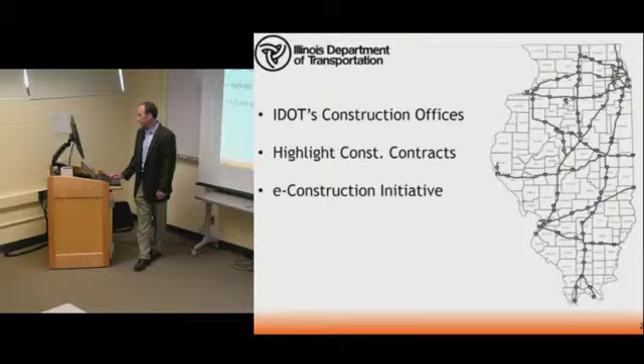So the mission of the Illinois Department of Transportation is to design, build, operate, and maintain a world-class transportation system that provides safe, efficient movement of people and goods to support the state's national and world competitiveness. It's also to make sure that our transportation system is safe. Our mission is also to increase the quality of life of our citizens and visitors by reducing congestion and increasing their mobility. And we do all of this while demonstrating a respect for the environment.

In simple terms, what makes a great transportation system great is its ability to connect users from their origins to their destinations. We don't just have a transportation system to have a lot of lane miles and a lot of bridges. We have a transportation system to make sure people can efficiently connect from point A to point B, regardless of where those points might be.

So the department is led by a secretary who is appointed by the governor. We call it the Secretary of Transportation. The department was reorganized by our current secretary to consist of 9 offices. These offices include the Office of Highways Project Implementation. That's the office that I'm in, as well as IDOT's Highway Construction. That's where we're housed. Another office is the Office of Intermodal Project Implementation. They deal with railroads, airports, other modes of transportation. The Office of Planning and Programming. They deal with helping develop the size of our program. How much money do we have to spend on what we can build?

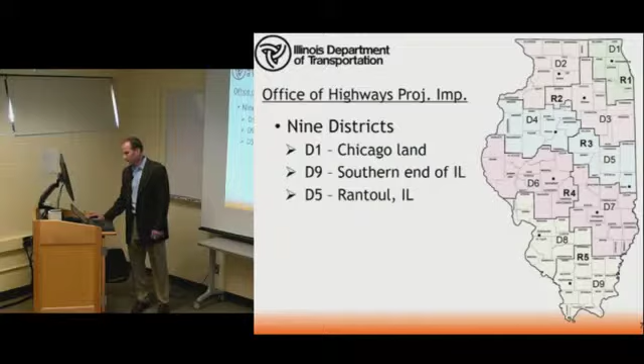So the Office of Highways Project Implementation is organized into 9 districts. These districts are distributed statewide, as well as 7 central bureaus. All of the central bureaus are located in Springfield, Illinois. District 1 is located up in the Chicagoland region. District 9 is the southern tip of the state. For the people that are here in this room today, you're in Rantoul, you're in District 5. So that's how our districts are organized.

The 7 central bureaus include the Bureau of Construction, again where I work, the Bureau of Bridges and Structures, the Bureau of Design and Environment, the Bureau of Land Acquisition, the Bureau of Materials, the Bureau of Operations, and then the Bureau of Safety, Programs, and Engineering. These 7 central bureaus work with our counterparts in each of the 9 districts, again, to design, build, operate, and maintain the highway infrastructure that the department has.

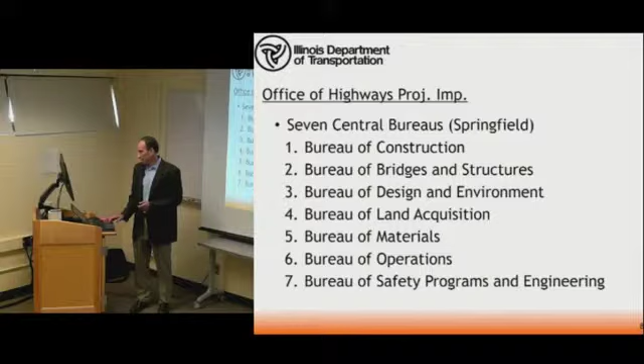Just some fun facts: the state highway system that I'm referring to consists of about 16,000 centerline miles or 46,000 lane miles. That's what we have on our state system out there, not including the locals. We have about 7,800 bridges, and those 7,800 bridges include about 84 million square feet of bridge deck. So we have a pretty large system that we have to design, build, operate, and maintain.

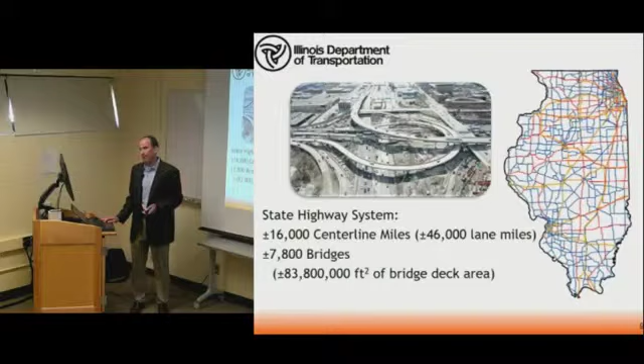We do all of this with about $2 billion a year. Now this varies from year to year. It's not necessarily a real stable number, but historically, if you were to look at it over time, it's been about $2 billion a year. That might sound like a lot of money, but people are typically surprised to learn that this revenue that we use to maintain our system has really been pretty flat, increasing just a little bit since the 1990s.

How many people in this room, other than myself, were alive in the 1990s, in the early 1990s? So just a few.

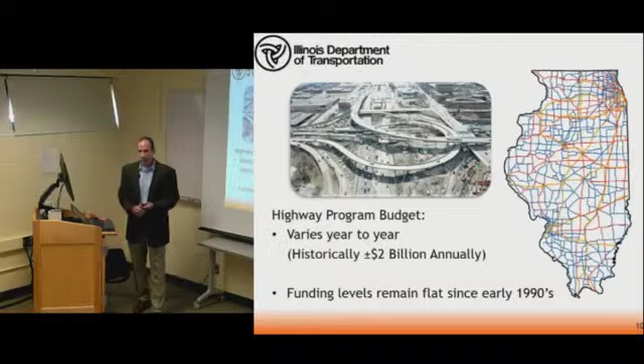So I trust that you all realize that since the early 1990s, we've added to the size of our infrastructure. Our cost to design, build, operate, and maintain this infrastructure has increased exponentially. So it's a struggle sometimes to fulfill that mission of providing that world-class transportation system. So we have to be smart about how we use our limited resources.

Ways that we can do this is by not necessarily always fixing the worst first. Sometimes you'll see us working on some projects that don't seem to be in as bad a shape as another piece of our infrastructure. But we do that because if we can implement preservation treatments at the right time, we can reduce our maintenance cost, therefore being more wise with the use of the limited funds that we have.

Obviously, though, we also have to try to find new funding sources. The 1990s funding levels won't work forever. We're going to figure something out, and so we're constantly trying to do that. We also have to continually look for ways to make our system more efficient. It's hoped that the developments in technology, specifically with autonomous vehicles and connected infrastructure, will help us get more capacity with our existing lane miles.

In the past, the most common method to increase your highway capacity was to add lanes or add to the size of your footprint. In the future, it's believed that these connected vehicles and connected infrastructure are going to help us get more throughput on the existing footprint that we have, since the cars are smart and they can kind of talk to each other. Therefore, we may not necessarily have to keep expanding the system like we have done in the past.

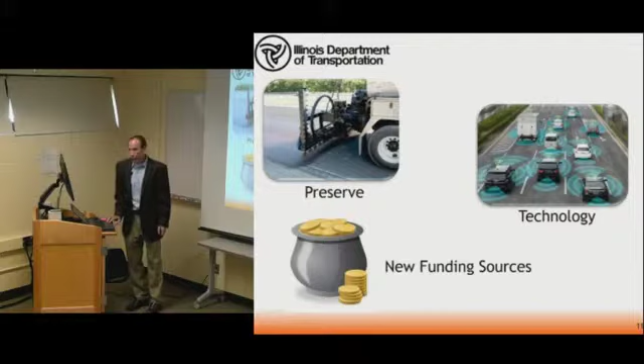But anyway, you all in this room are thinking, this is a long way from construction. So let me get back on topic of actual construction stuff. The best way to summarize construction is we build projects. The construction section of the department is responsible for projects once they're included on a letting. Once we include contracts on a letting and get them awarded to a contractor, we take over responsibility for them, and we maintain that responsibility until the contract work is complete and we've accepted the work.

At that point, we hand the torch to our operations section of the department that operates the facilities that we've built. Let me back up here just a minute. Remember before I talked about how we have 9 districts and 7 central bureaus? Our district construction staff is responsible for the day-to-day contract administration.

The department staffing for a contract will typically include construction inspectors. These inspectors monitor the contractor's work activity to ensure the work is in compliance with the contract. They conduct field tests on materials to ensure that the materials meet the contract requirements. They document their monitoring and testing activities so that we have records of everything that we've done. And they're also responsible for measuring and recording quantities of work that has been completed.

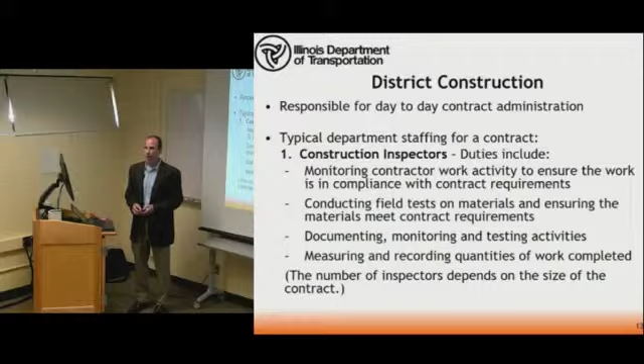The number of inspectors that you'll see on a construction contract will depend on the size of the contract. Small contracts might just have the RE, I'm going to get to the resident engineer in just a minute, but might just have 1 or 2 people on them. Large contracts might have in the 10s or 20s or 30s of inspectors. So after the inspectors, I'm going through these in the order of hierarchy. The next level is our resident engineers or our resident technicians.

Each contract will have a resident, but a resident may have more than one contract. So a resident might be responsible for multiple contracts at any given time. There is no single more important position in the Office of Highways Project Implementation than a resident engineer, or a resident technician. Residents represent our office in dealings with the contractor, in dealings with cooperating government agencies, for example, local cities and villages, the Federal Highway Administration. They also represent our office with the traveling public and the taxpayer on a daily basis. On a construction contract, the resident engineer is the face of the department.

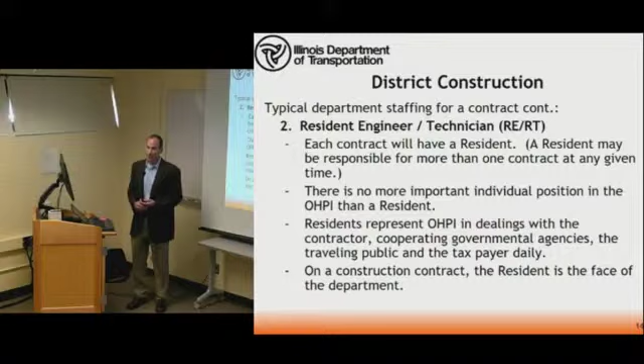The duties of a resident typically include supervising their assigned inspectors, monitoring the work, and assisting these inspectors as needed. The residents also have to insist on a high standard of work in accordance with the contract requirements, while recognizing that the project is custom built. So they have to make sure the contractors are building what they're supposed to be building us, but they also have to realize that changes are going to happen, and they have to work through those changes to ensure we administer stuff in the most economically and timely manner possible.

Residents have to monitor the contractor's progress and professionally communicate their concerns to the contractors. These can be a lot of tough conversations. Oftentimes things don't go well in construction, or you hit road bumps. When everything's going smooth, everything's rosy. When something starts to go south, tensions can get high. There's a lot of money involved with heavy highway construction. So the resident has a difficult challenge to keep their professionalism and communicate any concerns that they have to the contractors to keep our contracts on task.

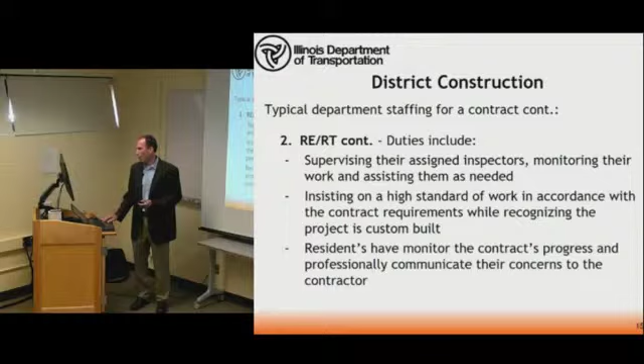Residents have to anticipate problems and then solve them before they result in costly and timely delays. Residents have to pay prompt, sympathetic attention to the problems brought forth by the public. At the end of the day, the public is our customer. We're building stuff for their use. We're connecting those origins and destinations. Customer's always right, so we have to treat them with their due respect.

And residents are also responsible for preparing and submitting progress payments for completed work. I could go on and on about the requirements or the duties that a resident engineer or a resident technician have to perform, but you all get the task. This is a very busy position and a very important position.

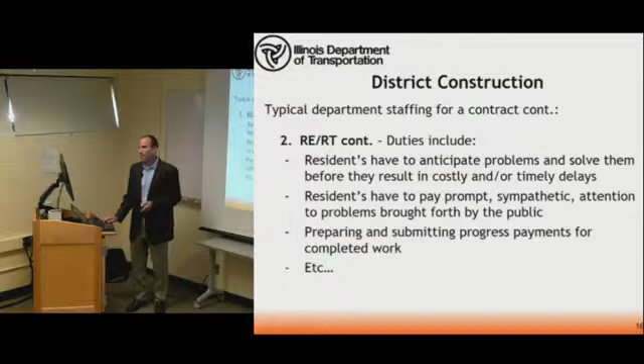Then as you climb the ladder, above the residents, we have what we call typically supervising field engineers. Supervising field engineers supervise their assigned residents, they monitor the residents' work, and then they provide assistance to the residents as needed. This assistance often involves resolving conflicts, approving changes that have arisen, and interpreting the specifications.

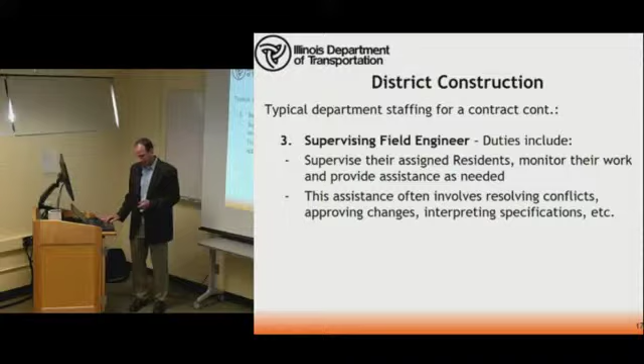After the supervising field engineer, or right above the supervising field engineer, we'll have what we call a district construction engineer. The district construction engineer heads the district's construction section, and they are charged with administering all construction activities of the district in accordance with the specifications and department policies.

And then lastly, as far as in the realm of construction, above the district construction engineer, we have a project implementation engineer in all of the districts. The project implementation engineer supervises the construction engineer and the materials engineer, and they are ultimately responsible for all construction and materials sections of the district.

Next, after we move out of the district and we come back to the Central Bureau of Construction, which is located in Springfield, again where I work, the Central Bureau of Construction responsibilities include pre-qualifying contractors to bid on our contracts. So the way our contracts work is we have what's called a letting. We advertise contracts on a letting or solicit bids via this letting terminology. And we don't just let anybody bid on the projects.

We pre-qualify them to make sure we have a level of comfort that when we enter into a contract with these people, if they were the successful low bidder, that they have the capacity to actually do the work. Nobody wants to start a job, get in the middle of it, and then find out our contractors, for whatever reason, aren't able to complete it. So we pre-qualify the contractors to bid.

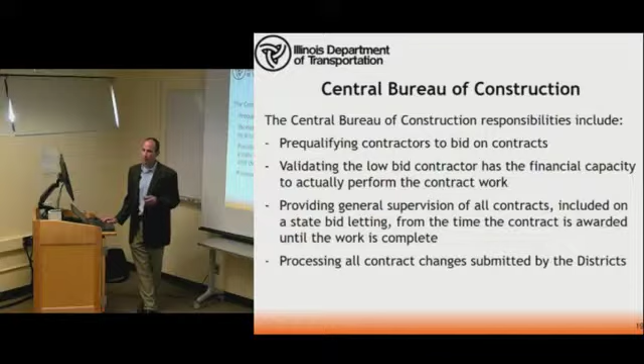The Central Bureau of Construction is also involved with processing all contract changes that are submitted by the districts. So something arises in the field that necessitates a change, the Central Bureau of Construction processes those changes, looks at some of those changes depending on the nature of it, and then helps process them through.

The Central Bureau of Construction also processes all progress payments that are submitted by the district. So all payments for all of the construction work that you see across the state in our system flow through our office to the comptroller to ultimately get the contractors paid for the work they performed. Central Bureau of Construction assists with the resolution of construction problems and disputes as needed.

We are responsible for developing uniform construction policies, practices, and specifications, and we do this in cooperation with the districts, with the other central bureaus, and with our industry partners. And then the Central Bureau of Construction also provides training to help ensure that the specifications and policies are administered consistently statewide. A contractor that's working in District 3 or 4 should expect us to interpret policies and administer specifications the same as we would in District 5.

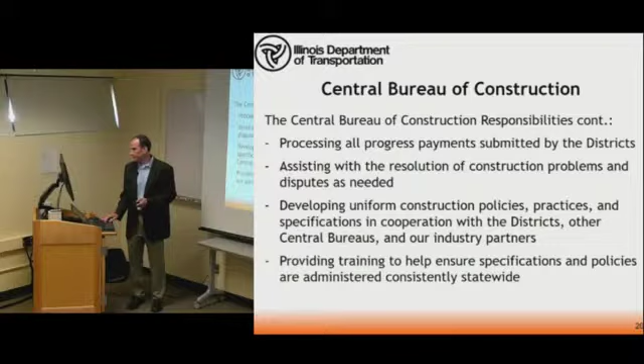So that kind of brings me to the end of an overview of the department. I know that's all real exciting stuff. So now I'm going to roll into an example project and actually show you all what it is that we actually build, or typical stuff that we build.

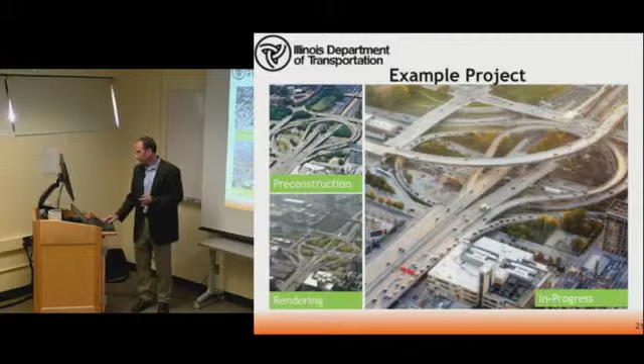So this project is oftentimes referred to as the Circle Interchange, and it's up in District 1, the Chicagoland region. The formal name of this interchange is the Jane Byrne Interchange. The Jane Byrne Interchange is located in the heart of Chicago, and it connects I-90/94 to the north with the Congress Parkway to the east, the Dan Ryan I-90/94 to the south, and then the Eisenhower Expressway or I-290 to the west.

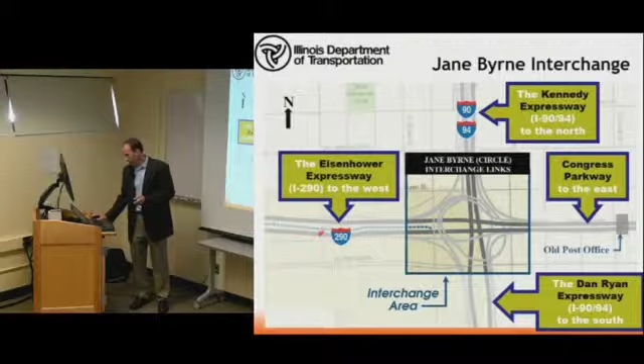The Jane Byrne Interchange, oops, sorry, let me back up there. The Jane Byrne Interchange was built in the 1950s and the 1960s as part of the interstate highway system, and this interchange is critical to the nation's transportation system, particularly for freight movement on the interstate system and arterial roadways, as well as to regional railroads and waterways.

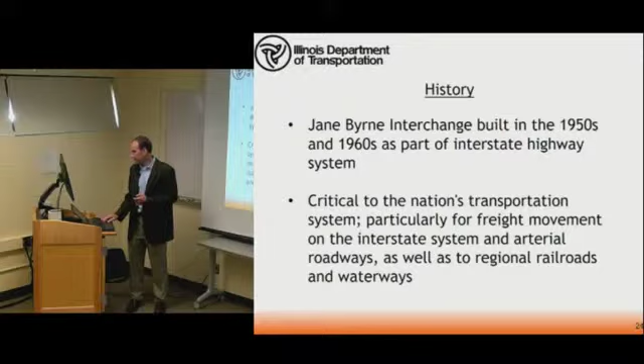The problem with this interchange is that it was built more than 50 years ago and hasn't had a major rehabilitation since this initial construction. Again, you all can imagine the volume of traffic and the things that have changed from the time this interchange was built in the 50s and 60s to what it experiences today. So we have high traffic volumes out here, single lane ramps with tight curves that make the interchange prone to congestion, which causes it to operate under breakdown conditions for most of the day, meaning gridlock most of the day.

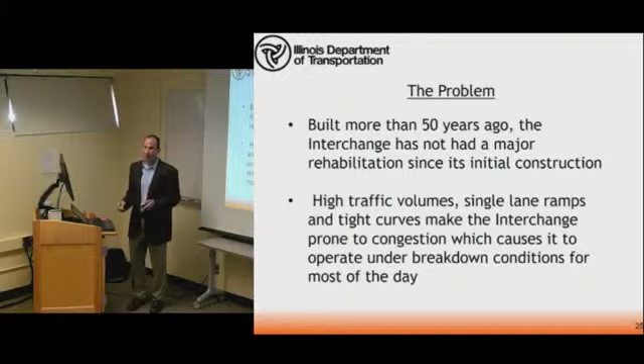The American Transportation Research Institute and the Federal Highway Administration have indicated that this is the slowest, most congested highway freight bottleneck in the nation. We have about 400,000 vehicles a day go through this interchange, and on average we have about 1,000 reported crashes a year. So it has some issues.

The purpose of the improvements that we're making at this particular site include improving the safety and mobility, improving the bridges, roadway, and drainage systems, doing this while minimizing environmental impacts, and it's also to enhance community connectivity on the local street network.

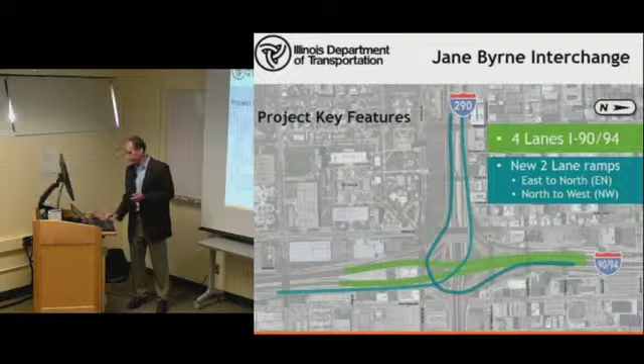Key project features also include reconstructing several of the crossroad bridges, or the structures that are carrying various streets across the interstate system. So these include Morgan Street and Peoria Street that are crossing I-290, Taylor Street, Harrison Street, Van Buren Street, Jackson Street, Adams Street, Monroe Street, all of those that are crossing I-90-94, as well as redoing a whole bunch of other bridges and ramps in the heart of the interchange, and building some big flyovers that I just showed you a minute ago.

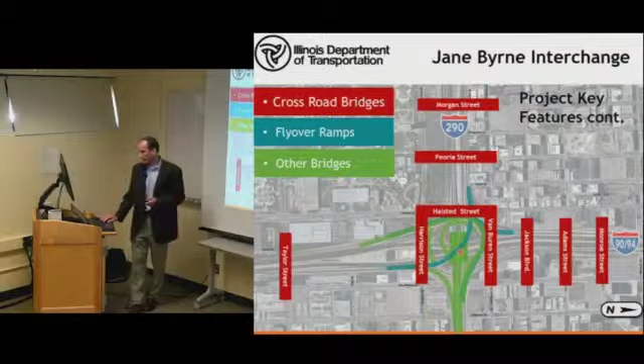The total estimated cost for this particular project is around $680 million, so it's a big project. This number includes all of the engineering, both the preliminary engineering and the construction engineering. It includes all of the land acquisition cost, all of the actual construction cost. We build in contingencies because we know there are going to be changes, etc. So that's kind of our total estimate for the project.

And this particular project is broken into 35 separate construction contracts. So remember when I said before, the way we do this is we have a letting, we advertise contracts on the letting, and then contractors bid on those contracts, and then we select the low bid contractors. This particular project has 35 separate individual contracts that will be let for people to bid on.

We started letting projects in August of 2013, and we will continue to do so, I believe, through September of 2020 is what our current targets are to get all of these 35 projects let. The overall completion of this project, if everything stays on task, we expect to be done out here around November 30th or December 1st in 2022. So we've got a lot of work left to do. We've got a lot done, but we have a lot left coming.

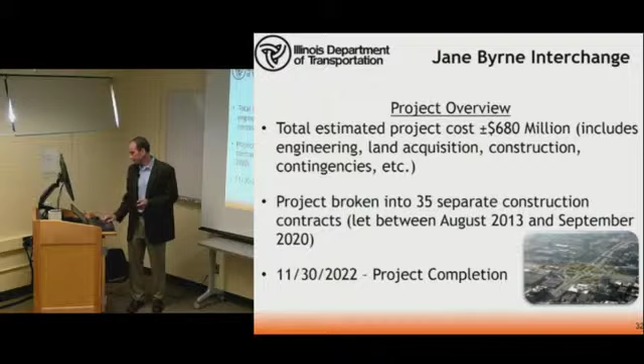The status of where we are today is that 16 of the contracts are substantially complete, or we've got most of the work done. That's about $250 million of the 680 we've got done. We have 8 contracts currently under construction, total value of work of around $160 million. And we have 11 contracts that are remaining to be let, or about $270 million. As I said, we're going to be letting projects all the way up through 2020, so we don't have all of the design done yet. The design for this project is about 70% done, and the construction is about 60 to 70% complete.

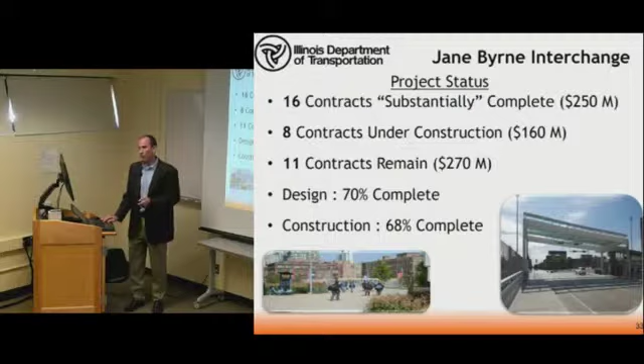So to help you understand the substantially completed construction, or what we've done so far, this slide demonstrates that we've built Taylor Street over I-90-94. We have the north to west flyover bridge complete. We have completed Harrison Street over I-90-94. We've completed Halsted Street, Peoria Street, and Morgan Street.

Halsted Street, I'll show a photo of it being completed a little bit later. We don't normally build vertical type construction; we typically stick with horizontal construction. Retaining walls, roads, and bridges are what we typically build. Every now and then we do get called to do things outside the norm. So like Halsted Street, it has a canopy on top of that bridge for the CTA. And Peoria Street, it's a large structure, but it's actually just a pedestrian structure. And as part of that contract, it included building a new CTA station for people to board the CTA.

The ongoing construction includes the westbound I-290 main line. It includes a Jackson Boulevard utility relocation, ramp NE. So remember I said NE, they did a good job from the design standpoint of naming all of these ramps. So ramp NE stands for the ramp that's going from the north to the east. That's how they numbered them.

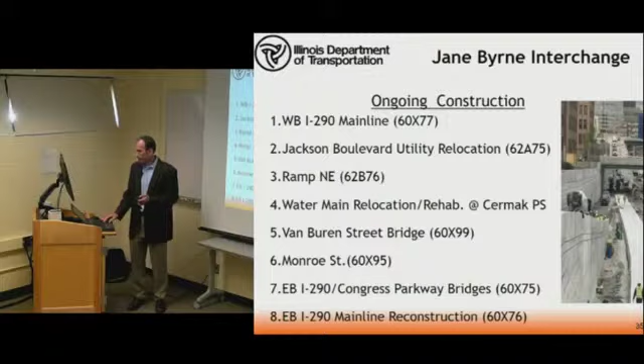Here we see where some of this major ongoing construction work is located. Again, this is what we're working on right now. So we have the eastbound and westbound I-290 main line. We have some water main relocation and retaining wall work down in this area. We have this ramp north to the east that we're working on.

We have the eastbound I-290 bridges in here, as well as, actually down here, that includes the rehabilitations that we're doing to some of the Congress Parkway bridges. Congress Parkway turns into I-290 for those who have been in downtown Chicago or are familiar with this. We're also working on Van Buren Street over I-90-94. We have some utility work going on at Jackson Boulevard, and then we're working on the Monroe Street structure over I-90-94.

Some of the major upcoming work includes ramp EN, or ramp from east to north, as well as what we call the interchange ramp completion contract. There's a lot of work in this particular contract. Both of these first two bullet points that I show you up here, you'll note that we've got them advertised right now, and they're on our November 9th letting. That's our next letting, November 9th of this year. So these two projects are actually on that letting, and will quickly be changing from upcoming construction work to ongoing construction work.

We also have the Congress Parkway / Ida B. Wells Drive Viaduct painting coming up. We have the northbound I-90-94, southbound I-90-94, some interchange high mast lighting and ITS work we have to do, and then we'll construct the Adams Street over I-90-94 and Jackson Boulevard over I-90-94, and also we'll wrap things up with some green space, landscaping, and some minor aesthetic type things.

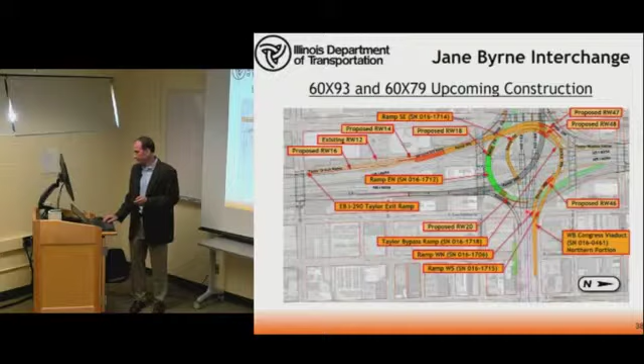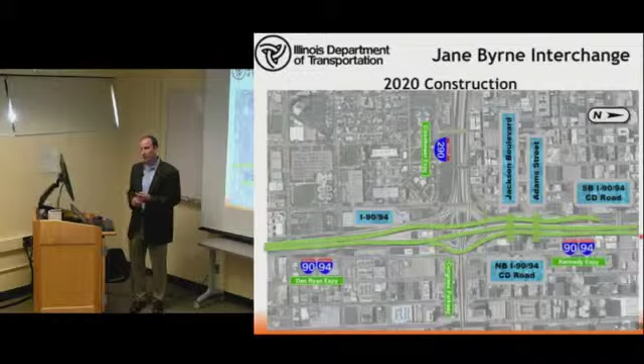Following construction of the east-west portion, when we get the I-290 and Congress Parkway work done, we're then going to switch over to the north-south reconstruction of I-90-94. This will also include the Jackson Boulevard bridges and the Jackson and Adams Street crossover bridges, and we're targeting to start some of this work around 2020. And again, the overall completion of the project is scheduled for December of 2022.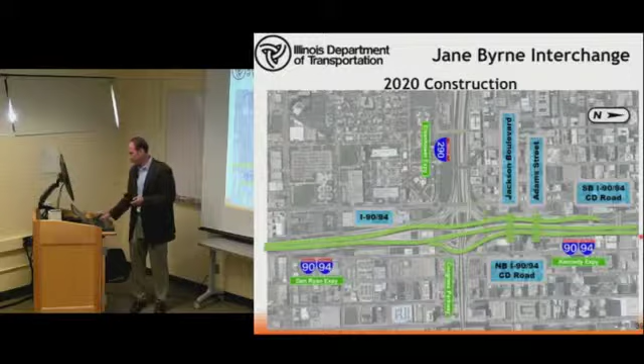Some of the expected benefits once this project is complete include improved safety, reducing congestion and delays, and also reducing environmental impacts. So remember when I started this, I talked about how this interchange is at gridlock most of the day. It has about 1,000 crashes a year that are reported. Those are the things that we're hoping to fix with this improvement when all is said and done. It won't be perfect because we still have a lot of traffic up there, but it will be better than it was.

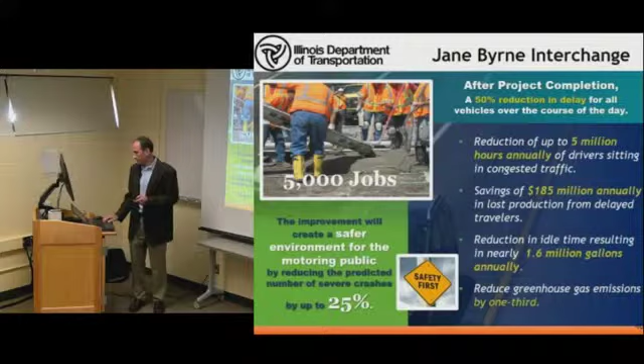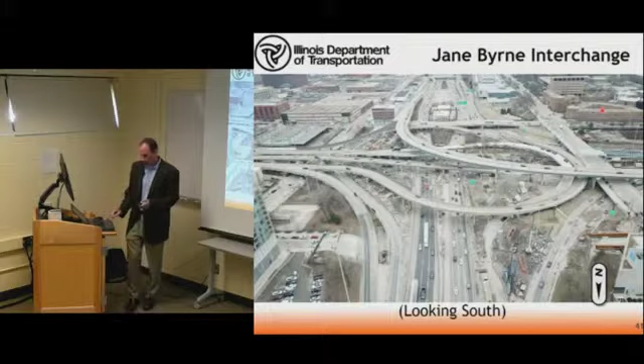We have a lot of different construction types out here. Typically, whenever we're building a bridge, we have our beams. Those beams might be concrete, they might be precast, pre-stressed concrete, or they might be steel. They might be rolled steel beams, they might be plate girders. And then on top of those beams, our normal construction is a cast-in-place reinforced concrete deck that the cars drive on.

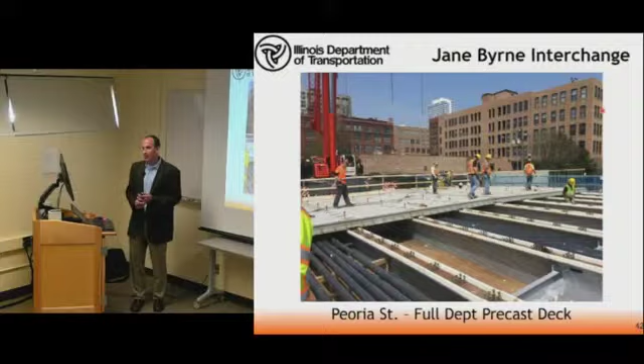On this particular structure, you can see if you look close at this photo that we're using full depth precast deck panels. So the way this works essentially is the precast concrete deck comes out, we lift it into place and set it on the steel girders, in this case, which is what this particular bridge is using. And after we got everything set in place, they used what's called ultra high performance concrete to lock the panels together, and then to also lock the panels to the actual steel beams.

When we got all of that done, we put a concrete overlay on top of the structure. I believe it was a latex concrete overlay that we put on it. But this Peoria Street is a big pedestrian bridge, essentially, that provides access from the south side of I-290 to the north side of I-290.

These temporary soil retention systems are commonly designed by the contractor who is responsible for the contract, and then we check and approve those to make sure the department's interests are being protected, that their construction techniques aren't damaging either our permanent construction or some existing construction adjacent to them, as well as making sure it's safe, because we're building in the middle of traffic, so we have to make sure that we're not doing anything to jeopardize the life, health, and safety of the traveling public with our construction activities.

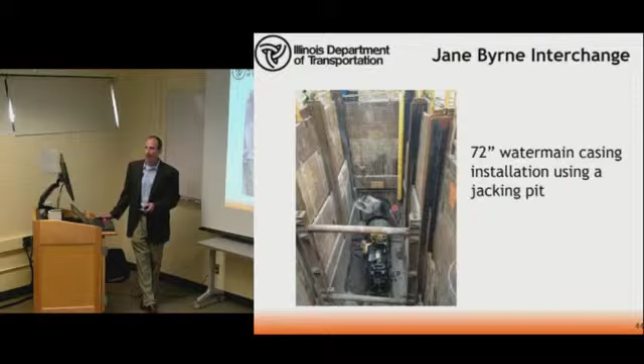What you actually see here, if you look closely, you'll see a gentleman down at the bottom, to give you kind of a feel for just how big all of this stuff is. And you see their jacking machine, or their boring machine, and then you see the casing being jacked. This is actually installing a 72-inch diameter casing, or a 6-foot diameter casing, to run a water line through that's underneath our roadway. So a lot of big stuff.

Most of the bridges that we're building out here are utilizing drilled shaft foundations. In Illinois, we have 2 types of deep foundations that we commonly build. They're either driven steel piling, or drilled shafts. Not to confuse the issue, we did have some micropile foundations, which are considered a deep foundation, on some of the structures up here. But our bread and butter is either going to be drilled shafts or driven piling. We typically use a lot more driven piling, like H piles or metal shell piles, than drilled shafts. But all of them have their purpose.

The typical shallow foundation that we would build would be like a spread footing. We don't build a lot of those. When we're building spread footings, it's either because we've got really good soils up top with no scour potential, like from a stream or anything to wash away those soils underneath our support, or we have rock really close to the surface.

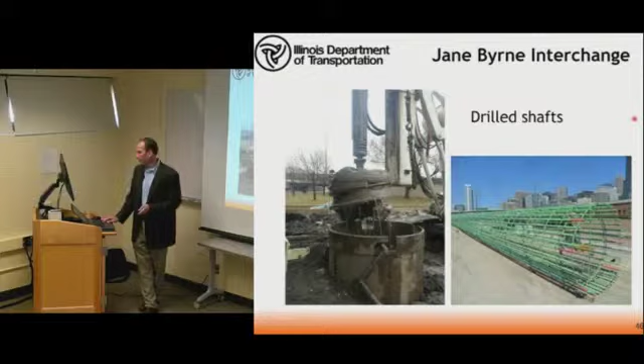Again, with these poor soils, at some point you have to transition from these ramps to pavement that's on grade, which normally involves an approach that's going up. Your ramp has to get a lot of clearance above the roadway that it's crossing, so you've got to start going up. What we're commonly doing out here for these ramp structures is we're building what's called mechanically stabilized earth retaining walls, or MSE walls, to transition from at grade up to get up on top of the bridge abutments and then continue across the ramp over top of the roadways that you're crossing.

Again, the soils are poor, so a lot of what they've had to do in a lot of locations out here is install what's called stone columns to improve the in situ soils that are up close to the surface so that they can handle the weight of this MSE wall that we're building. They're a big mass of fill material. It has a lot of weight. We don't want to have a lot of settlement.

Whenever we build these, unfortunately, we don't have the luxury of piling a bunch of dirt on it and letting the soils consolidate and settle for a year or two years or whatever, and then come back with our construction. So in this particular case, we're building stone columns to improve that ground, reduce the consolidation that's going to happen, and protect the pavement that we're building on top of it so it doesn't crack from a lot of settlement.

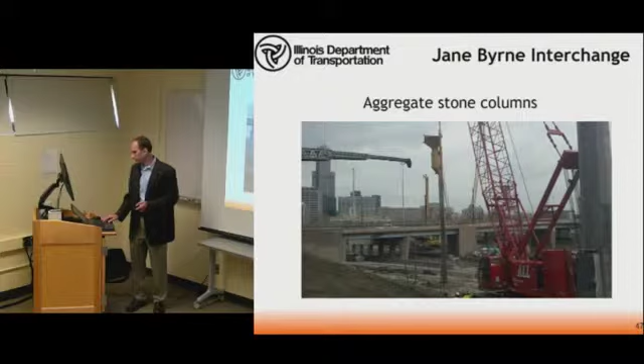In addition to using the stone columns, we are backfilling some of these MSE walls with lightweight cellular concrete. The normal way that you would construct an MSE wall would be, as you're putting up your precast panels to make this bin, you'd fill it up with fine aggregate, either sand or crushed or mechanical fine aggregate. That material typically weighs somewhere in the ballpark of 110 pounds per cubic foot. This lightweight cellular fill that we're using out here weighs somewhere in the ballpark of 30 or 40 pounds per cubic foot. So it's a lot lighter.

We're reducing the amount of load that we're putting on the soil up top. Therefore, these ground improvements that we're doing with our stone columns can be more economical by reducing the amount of weight that we're putting on them.

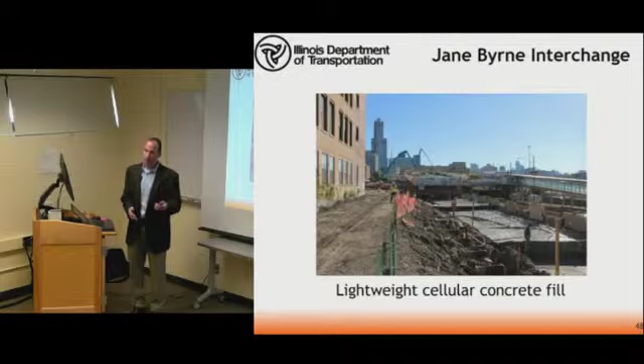For those who haven't seen MSE walls, this would be an example of a completed MSE wall out here. So again, down here is where you would have your approach roadway, that pavement on grade that's coming up to get on the bridge. If you could see underneath here in this dark area, you would start to see our beams for the superstructure that's taken off. This would be the abutment, if you will, that's on, say, drilled shaft foundations.

And inside of this, all of it is that reinforced soil mass. That's why we call them mechanically stabilized earth retaining walls. So the reinforced mass in this case is a lot of lightweight cellular fill that's supported on ground that's improved with stone columns.

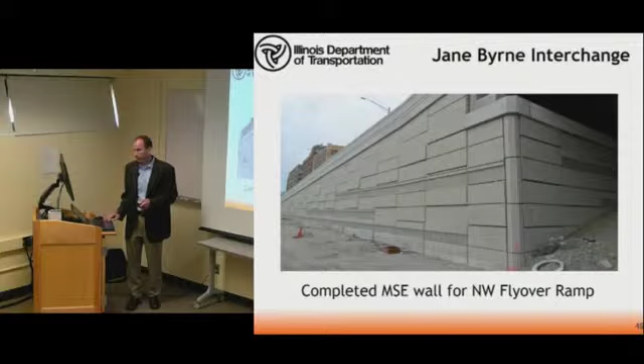We also have a lot of retaining walls that we're building out here. This is an example here in this particular photo. You can see a retaining wall that's being built, and notice the proximity of this wall to the actual buildings. It's very, very tight construction, and again, that's where we have to be careful that we don't damage other people's property as part of our construction activities. We have to use our due care.

Here we see those retaining walls where we're putting in ground anchors, also commonly referred to as tiebacks. We put tiebacks on these types of walls because a soldier pile wall commonly allows for a lot of horizontal deflection. We don't want a lot of horizontal deflection in these particular cases with these building structures up top, and we have to account for all of the surcharge load coming from these buildings. So we're installing these tiebacks.

If you can visualize a slender wall that wants to deflect from the load you're putting behind it, normally when you put tiebacks on a wall, you want to run them horizontal or near horizontal to handle the horizontal forces. In cases like this, we have very limited right-of-way, and because we have these buildings close to us, we can't send our tiebacks or ground anchors off of our right-of-way.

So in this case, if you look closely, you'll see they're installing these ground anchors at about 9 to 15 degrees from vertical, which isn't the most economical solution. In a perfect world you wouldn't do this, but when you're constrained by your right-of-way limits and you can't buy more right-of-way, you've got to do what you've got to do.

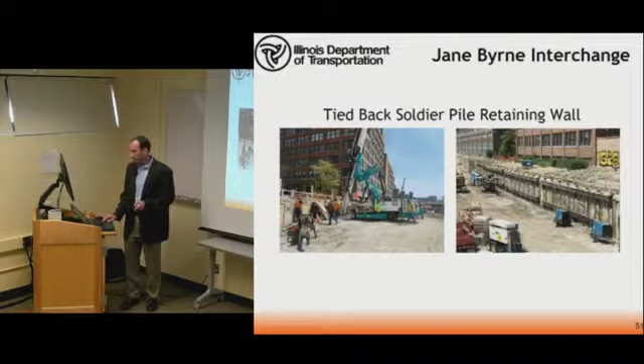Here we see some photos showing curved girder erections. This is a girder being lifted into place. If you look closely, you can see the curvature. This work is being done over high volume expressway lanes, so we have to close some lanes. We have to move through this erection very expeditiously to minimize the impact to the traveling public, and we have to do it safely.

For this sequence, the contractor's using shoring towers to help support these girders once they get them lifted into place. Our specs require contractors to have an Illinois structural engineer design or develop an erection plan for these types of beams. Then they submit that to the department, which reviews and approves it to make sure everything's going to happen safely.

Curved girders can be extremely problematic, more so than straight girders, because depending on the amount of curvature, the center of mass of the girder shifts. If you drew a chord from one end to the other, the center of mass gets outside of that chord. So if you just set that girder on two supports, by the laws of gravity it wants to fall over on its own. You don't really get stability until you get a couple girders bolted together.

All of that has to get detailed and worked out in the erection plan, and then we have to make sure the contractors are following that erection plan, using the right cranes, bolting the right numbers of girders together, so that we're doing our work safely. We're not jeopardizing the life, health, and safety of the traveling public, and we're also protecting the quality of work, so we know what we're building is in accordance with the contract specifications.

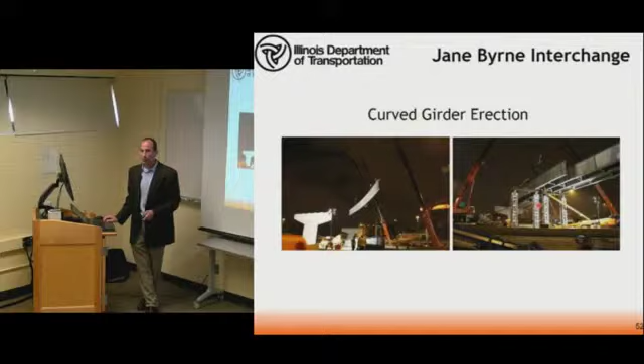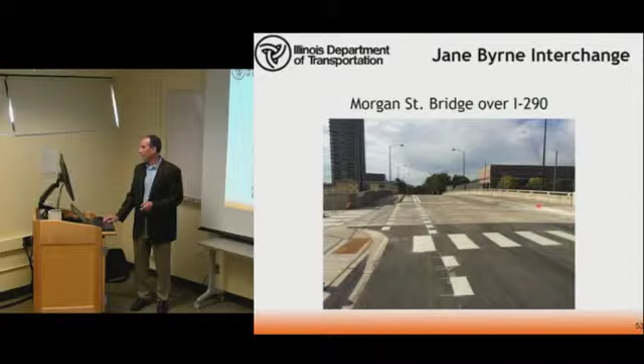Here are some photos of some completed bridges. Remember, I talked about the stuff that we have substantially complete or done. This is a photo showing the completed Morgan Street structure over I-290.

Here are some photos of that Peoria Street pedestrian structure with the CTA station that I talked about, our Chicago Transit Authority station. The lower photo is standing on Peoria Street looking at the entrance to the CTA station. The actual structure, the bridge, as well as the CTA station were all new.

This photo is taken from I-290 looking back up at Peoria Street. This is the entrance you're seeing here, down on this end coming into the station. This is just showing the station as a whole and what got built out here.

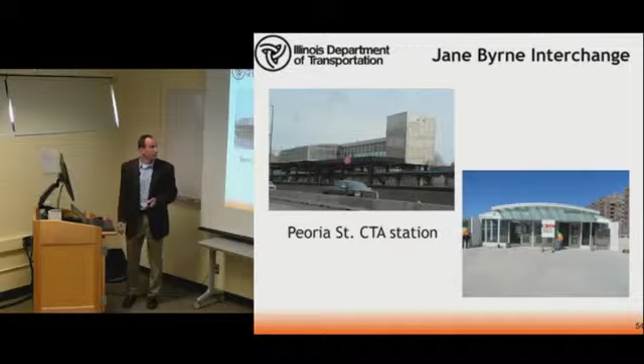Here is a photo of the Taylor Street Bridge over I-90/94 that was recently completed. And here is the Halsted Street Bridge and the CTA station canopy over top of I-290. This is the canopy that I talked about. If you remember one of those earlier photos I showed you, that's where you're at here.

All right, so hopefully that gives you a good feel for what we actually build in construction. When I say construction, what we actually do, we get these projects built that design has delivered to us.

The last thing that I'd like to touch on here this afternoon is the department's ongoing e-construction initiative, so that you can see some of the system improvements or some of the process improvements that we're making with regards to the use of technology.

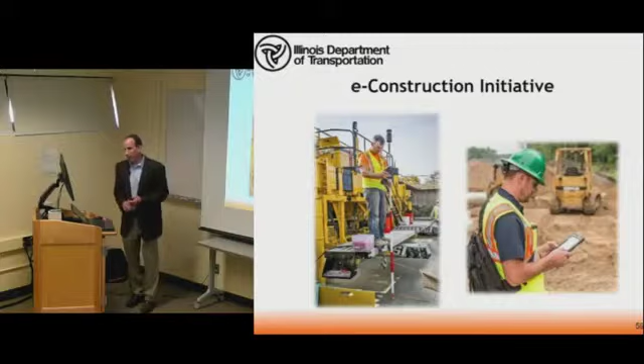So the department desires to utilize technology that will drastically reduce the use of inefficient paper processes, expedite communications and decision making while we're administering these contracts, enable the efficient retrieval and usage of contract administration data in ways that is not currently feasible, and then provide cost savings to the department.

We don't want to use new technologies just because it's cool and it's fun to use. We want to do it because it's a more efficient thing to do and ultimately results in savings to the department. Helps us get what we do done quicker and more economically.

And when I talk about here, this enable efficient retrieval of information and usage of contract administration data in ways not currently feasible, what I'm really referring to is, one, we can share this data during the contract administration process, but then now if we can capture this data in the right way, we can share it with other stakeholders. Remember when I talked about the Office of Planning and Programming, and then like bureaus of operations?

We can give this data or make this data available efficiently for other people to use whenever we're operating the system, maintaining the system, and then figuring out how to rehabilitate it in the future. Believe it or not, we struggle with that right now.

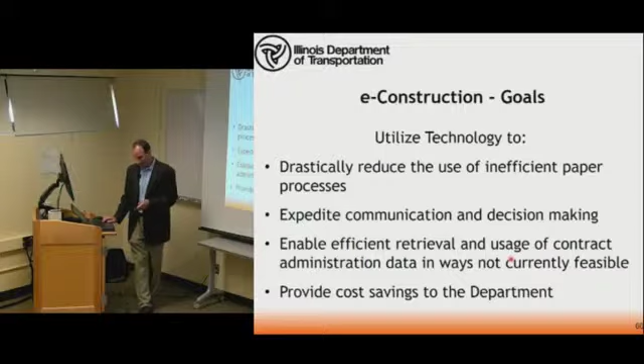So the major components of our e-construction initiative are, one, to implement a web-based contract management process, and two, to increase the use of electronic design data to facilitate construction and field verification of what we've actually built.

The web-based contract management process, or what we're developing there, will facilitate this paperless contract administration or near paperless contract administration that we desire to move towards. It will enable the electronic submission of construction documentation by all stakeholders, and then it will enable electronic approvals and then expedite our decision making.

So when I talk about stakeholders, the stakeholders on our construction projects will include the department, obviously will include our contractors who are building it for us. It'll include the Federal Highway Administration whenever federal funds are involved in the construction that we're building. And if it's a local agency project that was on our letting that we're administering or that we have some oversight over, it'll include the local agencies. So there's a lot of different stakeholders involved here.

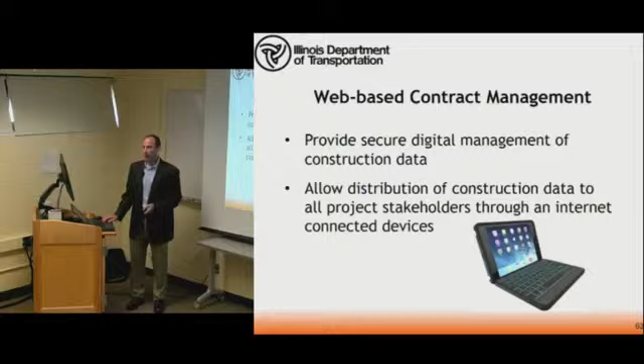The web-based contract management system that we're developing will provide secure digital management of the construction data, and then it will allow distribution of this construction data to all project stakeholders through internet-connected devices, like iPads, laptops, phones. It's supposed to work on all platforms.

So you probably think this doesn't seem new or earth-shattering, but let me paint the picture of where we're at right now. So our existing contract management consists of a contract record system that we call ICORS within the department, a materials record system that we call MISTIC, and then a contract payment management system that we call BCM.

The construction record system, or ICORS, is built on a Microsoft Access platform, and it truly is disconnected, installed on individual laptops, so a resident engineer on one contract doesn't have any connectivity with a resident engineer on another contract. It's all localized. The materials record system was developed in the 1970s. It's a mainframe database that was developed using COBOL.

So earlier, I asked the people in this room, how many of y'all were born in the 90s? And I got just a couple hands. The 70s is probably me. I was 72. So this has been around a long time.

The third system that I'm getting at here is our contract payment management system. This system was developed in 1992. It's also a mainframe system that was developed with COBOL.

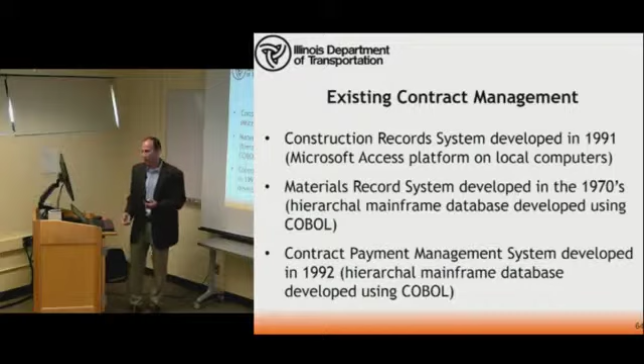So, I was surprised to learn when you get with the department and you deal with some of these old systems, I'm not exaggerating, there will be some data that you want, you know it's in the system. You'll ask for it, and the answer that you get is, okay, we'll run a report. It'll run overnight, and you can have it tomorrow. That's not really desirable with today's technology. That's why we're moving to these web-based systems to improve this communication, to improve this decision making, to save money off of the ways that we currently do.

The disconnected systems have served their purpose, and they continue to serve their purpose, but they really force us to be reliant on these heavy paper-driven processes. So it's also worth noting that right now, the way this works a lot of times, depending on the data that's being captured, many times it's somebody capturing it on a piece of paper in the field, and then they have to either keep that piece of paper themselves or give it to somebody else that's back in the office to then key the information into a system if it's data that we actually have to collect.

We're a smaller department now. We're never going back to what we used to be as far as the number of employees that we had. We can't afford to do processes like that anymore. So this new system will allow people to collect the data electronically in the field and have it. No more of this redundant re-entry of stuff where you have multiple people doing the same task.

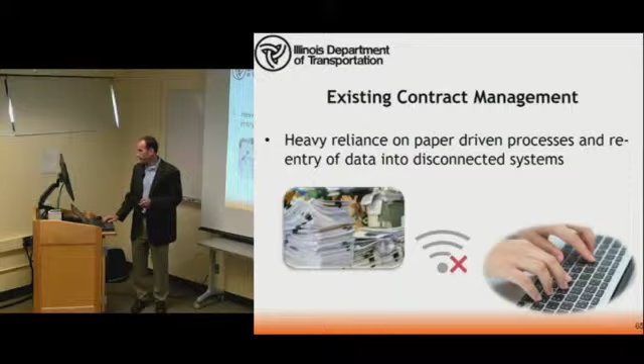So to fix this with our web-based contract management solution or system, we have a project underway that we're calling the Construction and Materials Management Solution, our CMMS. CMMS is going to replace the existing construction record system, the existing materials record system, and the contract payment management system with a web-based connected solution that will help us collect the information while we're administering the contracts, and then disseminate this information both during administration of the contract and then in the future to other users as we continue with other aspects of the department when it gets into asset management and operating and maintaining what we've actually built.

So the replacement of the existing construction record system, the existing materials record system, and the contract payment management solution won't fix everything, but that's the vast amount of data that we have to collect very inefficiently whenever we're administering construction contracts. So this will be a huge step in streamlining our processes. And it's a big part of our e-construction initiative.

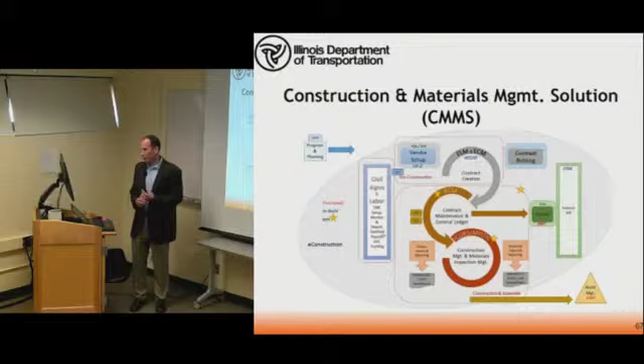So what we've done to date is in October of 2017, or roughly the 1st of November 2017, about a year ago, we executed a contract with a company named ExeVision. ExeVision is based out of Florida. They're a software company. The states that use ExeVision software already include Illinois, Iowa, Nevada, New Hampshire, Wyoming, and Texas.

From an Illinois standpoint, when I say we use it, we have electronic bidding. So when contractors are bidding to do work on our letting, they give us their bids electronically. ExeVision has been providing us with a solution to do that for a few years now. So this will be the next step, the contract administration portion of it.

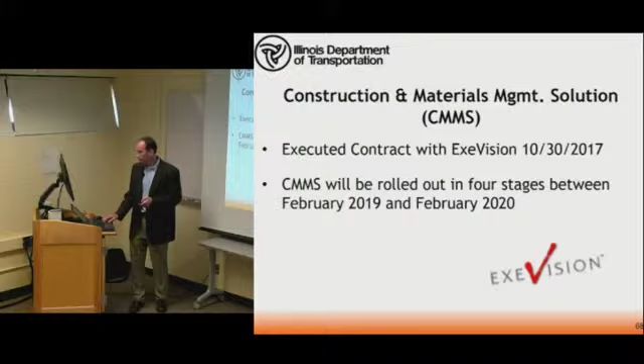So currently we use what's known as the electronic bidding subsystem of what they call IPD Web. In the near future, we're going to start using the construction management subsystem and the materials management subsystem. This contract payment management subsystem is all new. It's currently getting developed. ExeVision's solution is written in Microsoft .NET with SQL Server databases, and then all of this data will be stored in the Microsoft Azure cloud.

In the event that a job site does not have internet connectivity, because believe me, it still happens out there, while most of the state is covered with cellular connectivity that can get you on the internet, we have places where you can't get cell reception. This new system will have an app that will allow our users to collect certain information in the field, like diary information and quantity placement information, and then whenever they regain internet connectivity, it will automatically sync up and upload this data into the system, so we won't have this double entry where somebody's writing the data on a form and then typing it in later. We're working through that process.

Moving off of the web-based contract management, the next major component of our e-construction initiative is again that increased use of electronic design data to facilitate construction and field verification.

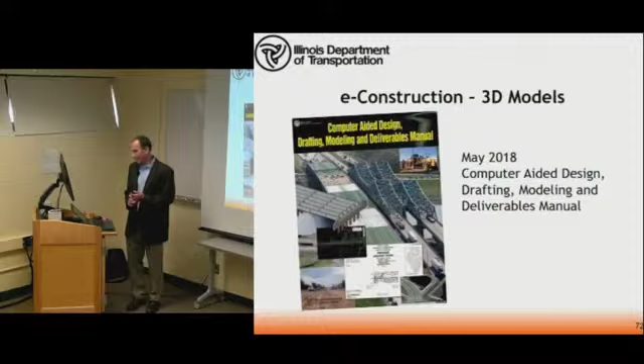Specifically, the electronic data that I'm referring to is CAD data, and more specifically, the CAD data I'm referring to is like 3D model data that we've started to develop during our design to hand off to us. In May of 2018, the department released a new computer-aided design, drafting, modeling, and deliverables manual. This manual is on our website. And part of what's in this manual is it covers what design should hand off to construction to help us conduct our construction activities more efficiently than we've been able to in the past.

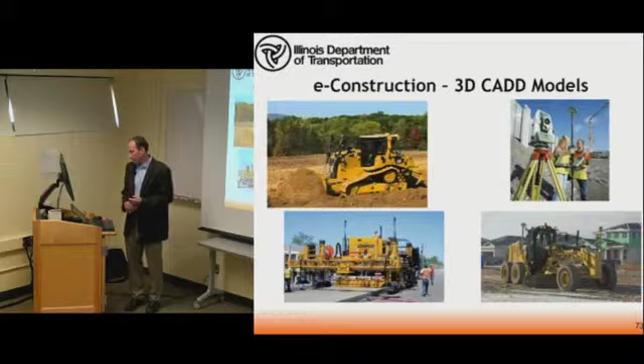An example of what I'm talking about would be the 3D model technology's ability to enable automated machine control or automated machine guidance. This technology has the ability to improve our construction process because it allows us to get construction to grade quicker. So obviously this results in a faster completion of construction projects, reduced equipment idle time, reduced fuel consumption, and less greenhouse gas emissions.

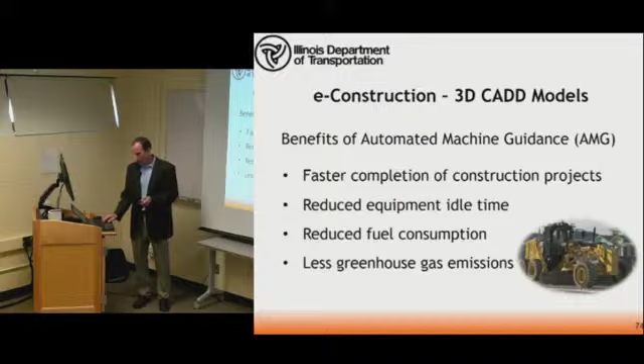These technologies also reduce the amount of construction staking and restaking that's required. This frees up our limited staff resources to work on other important tasks. We want to use this technology, again, not because it's neat, but because it improves our processes and makes us more efficient. We have to move away from processes that require redundant re-entry of information or redundant activities like staking a job and then turning around and staking it again in the future and then coming back a third time to measure up what's actually been built.

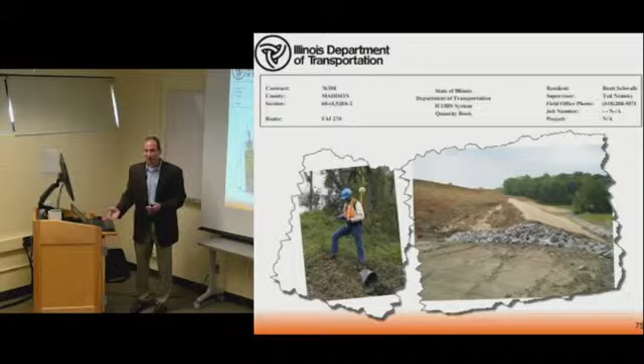So a challenge to the department and our partners, and I guess I would look at a lot of the people in this room as you embark on your careers, will be paying attention to this technology, looking for how technology can make our lives easier. It would be great if we ultimately at some point can find ways to couple these three-dimensional models, this CAD data that we're getting, with our other contract management data. Accomplishing this could potentially allow us to eliminate duplication of efforts associated with documenting construction, developing as-built plans, and developing a database of assets.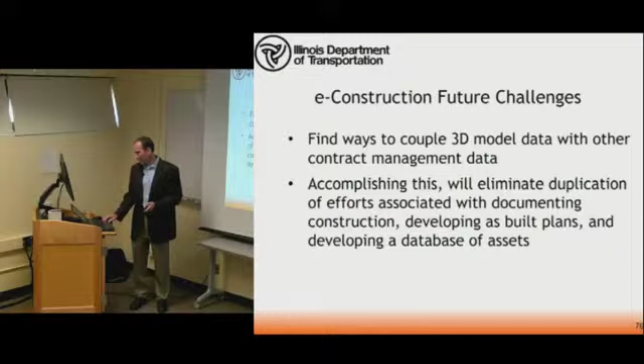As an example of this, it could be to collect the data from machine-grade control technology, use this data to generate daily as-built models and daily inspection reports and quantity records, and then ultimately pay estimates for partially completed work. Linking model information to a construction record system could allow us to associate material certifications to the three-dimensional models as well as GIS databases. Being able to efficiently determine locations where a specific material has been used could prove very beneficial in our endeavor to design, build, and operate and maintain a world-class transportation system.

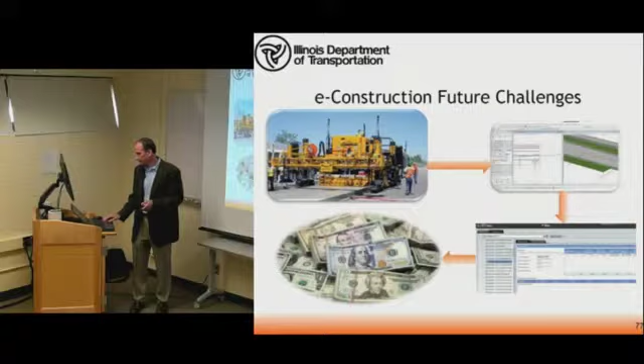So that's all I have for you with this talk. I would like to give some acknowledgments, people that helped me with the slides or with a lot of information that's contained in this presentation. That is Brian Kuttab from our IDOT District 1 Design Office. Eric Ray is one of our resident engineers in District 1, and then Ryan Sheley is one of our project review engineers that's in the Central Bureau of Construction. So with that, I'll take as many questions as you all have.

Does anyone have any questions for Justin? Yes, ma'am. To get the pizza? Yeah. Oh, you want to get pizza? Okay, you can take a 5-minute break or whatever and go get your pizza. Continue with the Q&A in the room. Sure. Do that. Thank you. Your pizza's probably cold if you didn't eat already. What's that? Take your pizza too. No, I'm good. Don't worry about it. You go ahead and eat those. If you don't eat, I won't eat. You got it. It was a very, very good presentation.

Well, thank you. Maybe I'll start with the question since I'm not eating. But it's really interesting to hear that since the 1990s, no increase in the infrastructure budget. That's what you mentioned. No significant increase. And I know that there's even sometimes a decline because of the crisis that we were having in Illinois because of the budget issues. Yes. And you mentioned some additional funding resources. What additional funding resources do you think can be a solution in Illinois?

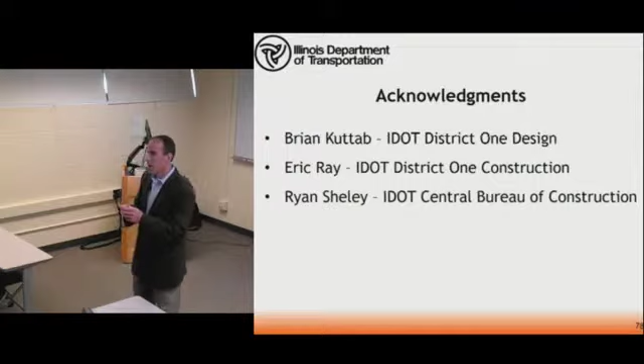Regarding the types of revenue sources, I don't know what the right answer is. There's a lot of groups working on it. One of them is called the Transportation for Illinois Coalition, or TFIC. You can go to their website, see some information, or you'll hear them talking at a lot of presentations. Some of the common solutions are, one, increasing the gas tax, trying to take this 19 cents that we get and increase it. Others are looking at a vehicle mileage-based system where you pay depending on the amount of miles you drive; if you drive more, you pay more.

That seems fair, but you know, I don't know what the right answer is, and I don't know what will win out. But everything has pros and cons. It's a tough decision. All I guess I would say is we'll take whatever we can get. We need people outside of the transportation industry, or we need people besides our engineers and our contractors saying we need more transportation funding, because admittedly it's self-serving.

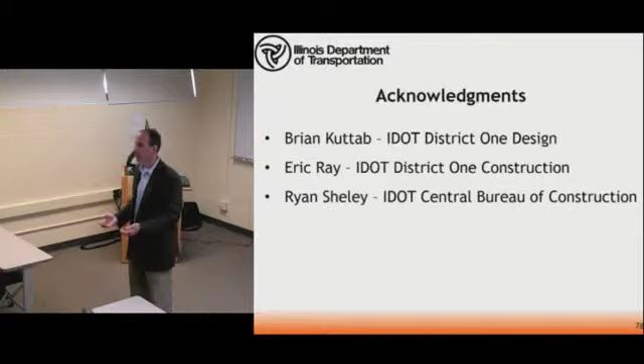I mean, I'm a guy that works for the Department of Transportation saying I need more of your money. We need people, we need our users of our systems to say, yeah, we don't like having posted bridges or closed bridges. We don't like having rough roads, and that will help us get to the solution ultimately, and less self-serving, I guess I would say.

Yes, sir. Or yes, ma'am, you had a question before you had to get some pizza. I was able to get a pizza, so thank you.

Thank you for the really nice presentation. I was curious with the initiative with the e-construction, how does that get implemented with the other districts? So how are we implementing the e-construction initiative with other districts? For example, with the contract administration, or the CMMS solution that we're developing, we've formed a team of about 40 core people from statewide, from all 9 districts. All of our 9 districts are involved, as well as our central office.

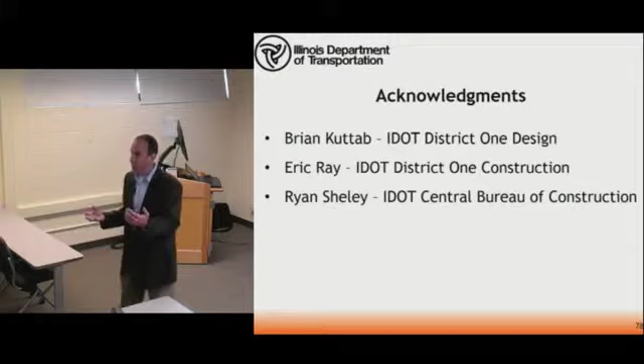That team was involved with selecting the vendor, Exhibition, that we have working on this for us. That team met after we selected Exhibition. We brought the 40 people together with Exhibition, had a meeting, and we kind of went through what we call a gap analysis. So Exhibition has a solution we call CMMS, Construction and Materials Management Solution. They call it IPD Web.

And so they come to us, we go through all of the requirements that we had in our request for proposals that we said we needed, and we made sure that we were on the same page with Exhibition as far as this is what we're actually looking for. This is what this requirement means. And we looked for gaps, things that they already had, things that they didn't have, or pieces of the puzzle they were going to have to develop and give to us. So all of these 40 people from across the state participated in these gap meetings with Exhibition.

After we got done with that, Exhibition has gone back and started configuring and developing their system. I say configuring and developing. What we call these are like COTS systems, customized off the shelf. Nobody makes a turnkey solution that we could just start using. AASHTO has a product called AASHTOWare. It's an AASHTOWare Project is what it's called now. They were one of the vendors that put in for us. We didn't end up picking that one. We had about 8 people put in saying that they could give us some type of customized off-the-shelf solution.

So with that, since nobody can give you a turnkey solution, you try to use as much as what they already have. You try to mold your processes to theirs, and in places where you can't, they have to develop functionality that you actually need. So after we had our gap meetings with all of these people, Exhibition went back and started developing small pieces of this puzzle, or small pieces of their system for us, and getting it configured right.

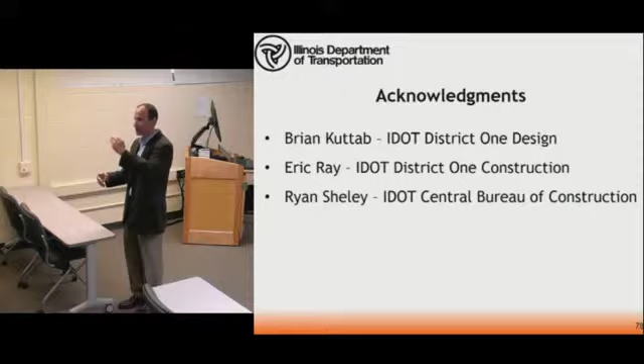So you take a cross section at what we call a station through the roadway, and we say what's the area of that cross section between the existing ground line and the new ground line. Then we go 100 feet away, take another cross section and look at that area. We average those two end areas together. Say this area was 100 square yards. This area was 300 square yards.

So the average is what, 200 square yards, and we multiply it by that 100 foot length and come up with a volume. That's not a really accurate way to do it. That's what we've done forever. That's how our specs say we compute quantities. To answer your question, yes, we are working to.

We have some specs now that allow electronic tools to be used for measuring, and districts are doing that. But in my opinion, our existing specs are still too focused on the technology that's being used. What we want to try to do is come up with some specs, and we're working on coming up with some specs that focus more on the accuracy of the measurement that's needed and less on how you get it.

So, if we need X for areas, we may need stuff to the tenth of a square foot or something of that nature, and then for volumes, to the cubic yard. So we'll focus more on the accuracy. Because right now, robotic total stations and stuff are spot on with X, Y, and Z. GPS units are spot on pretty much with XY. That's right, but your vertical, it's not.

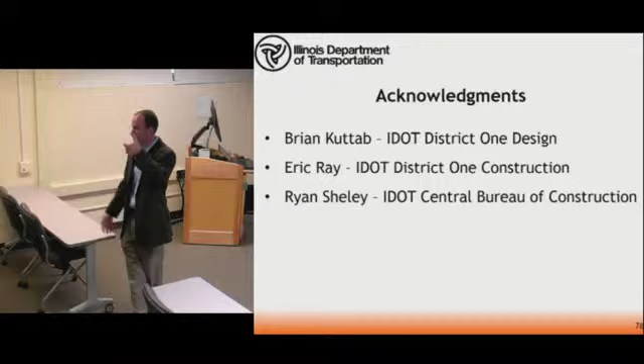So it's not that we want to tell people you can't use a GPS unit, because maybe there are base stations involved that are improving the vertical accuracy of the GPS unit to within a suitable level to use it that way. So that's why we want to focus more on what accuracy is needed and less on what technology you're going to be using. Yes?

My question is, thank you first for the presentation. You're welcome. My question is related to, you were talking about storing the data online, like there will be a database to store data. So I was wondering what IDOT is doing to cyber secure this data. So the question is, what are we doing to make sure this data is secure?

To be truthful, a lot of the data that we're collecting right now, if I was to go on my computer, I have what's called a P drive and an S drive and an O drive and a C drive. The C drive is the only drive that's on that computer. All the other drives are on servers. Right now, they're state-owned servers that are run by another department within the state government called the Department of Innovation and Technology, or DOIT. It used to be CMS, now it's called DOIT.

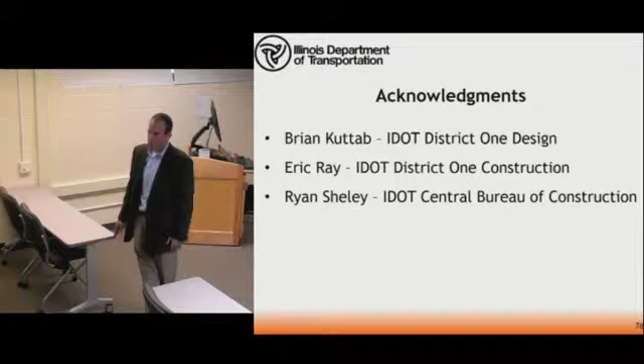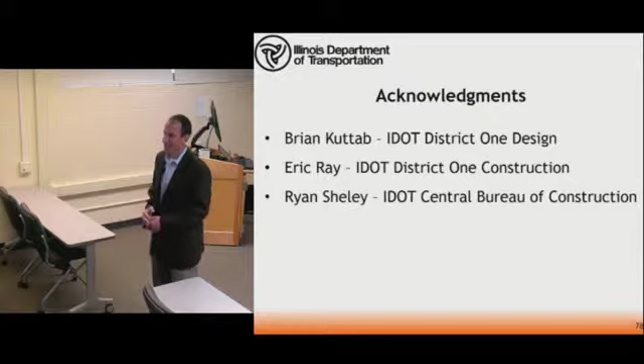But we're moving away from that. I mean, you run the risk of your state systems getting hacked the same way that you run the risk of private sector systems. You follow me? So whether we're storing it on the state server or on a private sector server, right now the state is good with that. I'm a civil engineer and a structural engineer. I just have to rely on the IT people to make sure they're doing their due diligence to keep that data secure so that it doesn't get deleted.

And we are a little more nervous too, as we move into this new realm. We have to have ways to operate if for some reason something bad happens and the internet goes down in an area. We still have to continue our construction operations. Nobody sitting in traffic in a construction zone wants to hear there's no work going on because the internet's down, right? We're going to have to keep working. So we will have to have processes in place that allow us to work offline.

I think what it will involve is maintaining a lot of the forms that we have right now, either in Excel spreadsheets or PDF forms, and hopefully at some point, with a future enhancement, maybe some type of APIs can be developed so that if somebody fills something out on a form, we have some efficient way to get that data into the system once things get up and running again.

But other than the data being removed, is the data public? So his question was, is the data actually public? Most of it will not be public. Most of it will only be accessible to a user with the appropriate credentials. So when I say that, not every user needs to be able to do every function that the system will do.

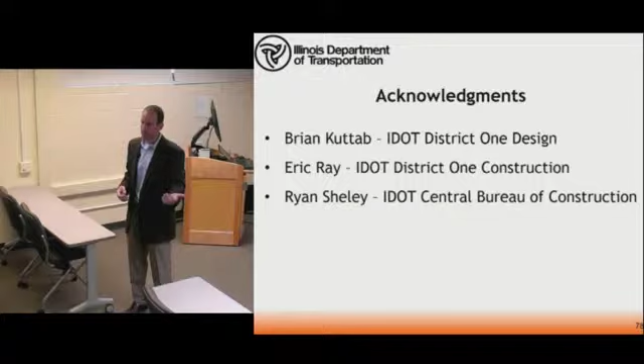For example, an inspector will need to enter quantities of work placed, will need to enter comments about that work. They don't need to post that work to a pay estimate. So while they'll have credentials to input certain information, they won't have credentials to input all information, nor will they have credentials to view all information.

And it'll be the same thing with contractors. Contractors will be giving us information. They'll be able to see the information they give us. Whenever we issue a pay estimate, contractors will be able to see their pay estimate to know what we're doing, the quantities we're recording. If you were the contractor, you'd be able to see what I've said you've done. But if he was a contractor, you would not be able to see the contract that he's working on.

We have a lot of data that we make available to the public right now, like vehicle traffic, the amount of traffic on our roadways and different things of that nature. Other data will only be available to, say, department personnel, but it'll be much more accessible than it is today. Right now, with our current processes, a lot of this data we collect on paper. We retain this data for 3 years, and then through records disposal, a lot of it we just dispose of. So we call them job boxes.

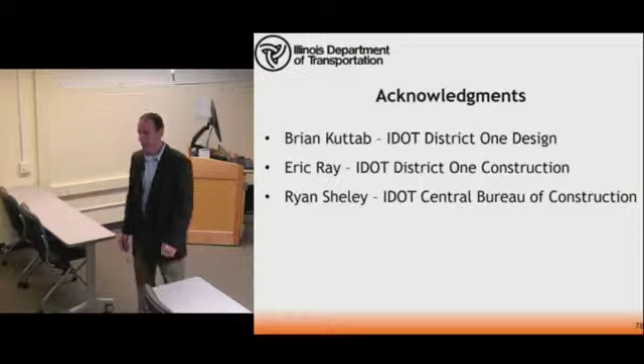It doesn't do us any good to get a portion of the work done, but you still can't use the system because you don't have something else done. So if you're doing roadway and a bridge, sometimes we'll have a roadway contract and a bridge contract. Sometimes we'll lump them together. But it really gets into dollars, and so we pay attention to the size of contractors and what makes sense, what are logical termini from one contract to another.

And then as far as what lettings they go on, that gets back into our planning and programming people who are telling us how much money we have to spend, how they're going to pay out, and we pay attention to that. In the state of Illinois, our fiscal year starts on July 1st of any given year and runs through June 30th of the following year. So we let things accordingly. We let only what we can pay for, if that makes sense. So that balances out some of that as well.

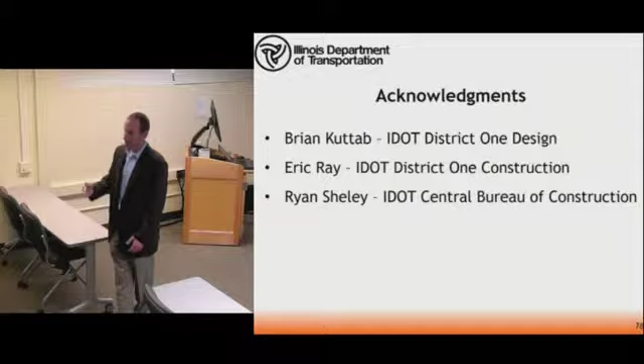Okay, with that, let's think just